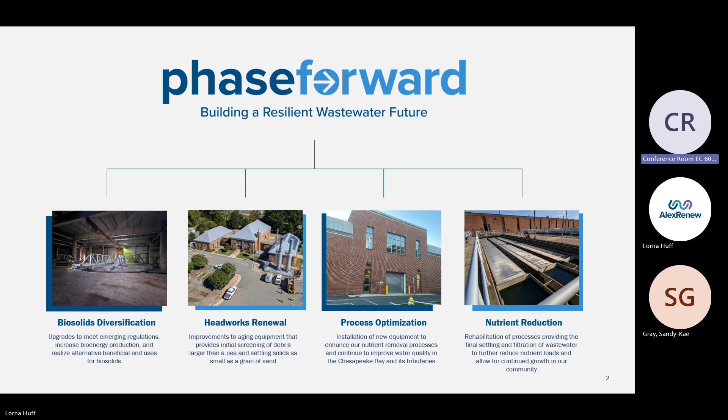Process optimization is the improvements to the centrate pre-treatment system. Mr. Chan provided an update and presentation on this back in February 2025 involving anammox and the red bugs. And then nutrient reduction was the subject of last month's board update on the tertiary project as a whole—the major improvements that were presented by Ms. Watkins.

So a quick update on the overall phase forward schedule for these 4 primary projects—a reminder of where we've been in terms of design, and where we're going in terms of upcoming milestones in fiscal year 26 and 27. The schedule we have laid out is fiscal year, not calendar year.

Starting with process optimization, this project is well in the middle of construction now, and we're targeting an August 2026 completion. On headworks renewal, design is advancing pretty quickly.

We have an amendment coming up in April 2026 for board review and approval. Following that, construction will kick off, and then we'll be approaching our final amendment in winter of 2027, with construction continuing on towards Q4 of fiscal year 2031.

On biosolids diversification, the solids upgrade program, we've had 3 amendments executed to date, with our 4th amendment actually up for board review and approval tonight regarding the thermal dryer pre-construction services. We'll touch on further detail on that later in this slide deck, as well as in reviewing the memo.

And then finally, nutrient reduction—we're really kicking off the design phase of this project tonight as well. It's up for board review and approval, with design services to start commencing in the next couple months. So, an overall highlight of the major milestones, project completions, and amendments for board review.

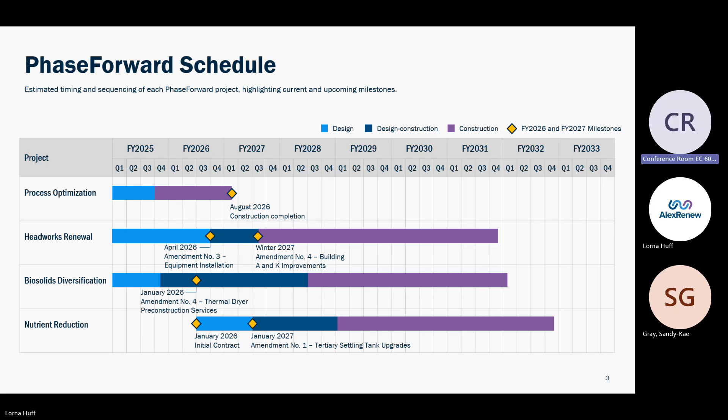So as we start to take a look at overall capital costs and where we're at, this slide highlights each project's major touch points and storylines. For process optimization, construction is nearing about 30% completion now, and we are on track for overall project completion this summer. Crews and the design team are now coming up with a plan to commission the system as a whole and bring operations and maintenance along.

On the headworks renewal project, this is the upgrades to the screening, grit removal type equipment. We've been taking a look at the scope over the last year, as well as our project budgets, and meeting with our operations and maintenance staff through design input sessions—opportunities for staff to tell us what they like about components, what they don't like, how they want the system designed and set up, and certain types of equipment or manufacturers that work with them.

We take that information back, make sure it's aligned with the overall project scope and goals, and ultimately come up with recommendations to make sure the project stays strict and specific to elements that are actually needed. Oftentimes we'll get requests for nice-to-haves or wants, but we've taken a look at the overall budget and scope over the last year and made sure we dial that down to critical needs and critical infrastructure and upgrades that need to be updated.

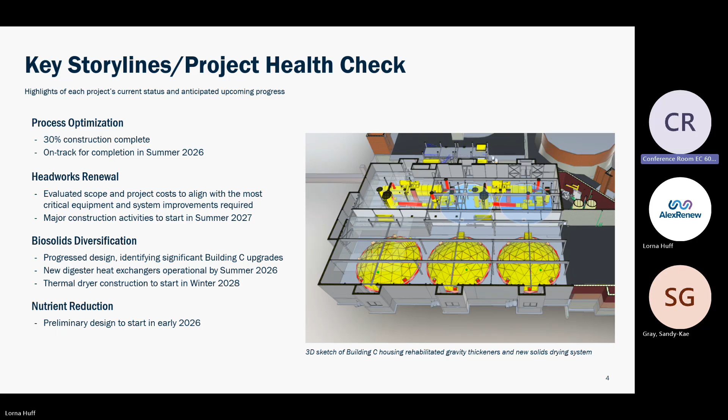As far as nutrient reduction, that preliminary design is going to be starting in early 2026, over the next couple months, with up tonight the initial contract for review and approval.

The next couple slides that we have laid out are really identifying a preview for FY 2027. We've identified on each of these slides the approved 2026 budget and the draft 2027 budget, highlighting key contractual milestones along the way. We've also had color-coded circles indicating board approved, pending any future action, and board approval via annual budget.

As we walk through these slides, you'll notice some projects have more green-coded bubbles associated with them. That lends itself to getting more cost certainty as the project moves forward. And then we'll ultimately take a look at overall program cost certainty.

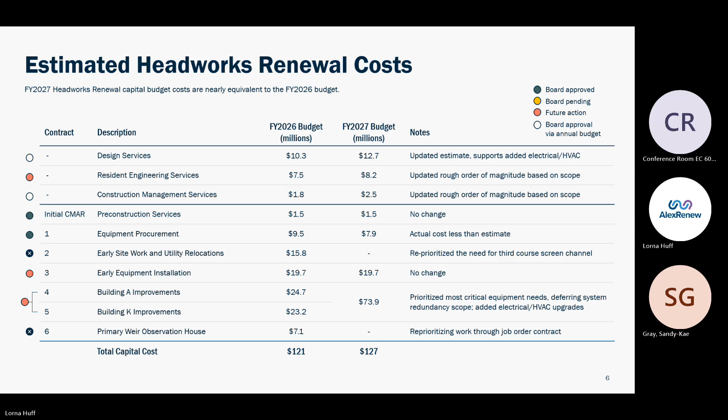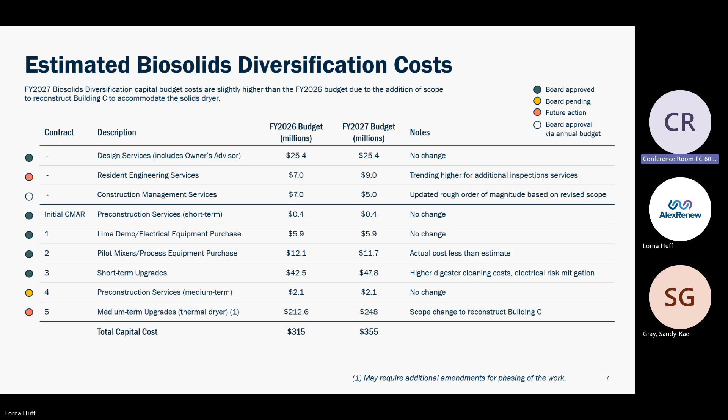We just went to the board last month to do an update on where this project stands. And for tonight, it's review and approval of the preliminary design of that project.

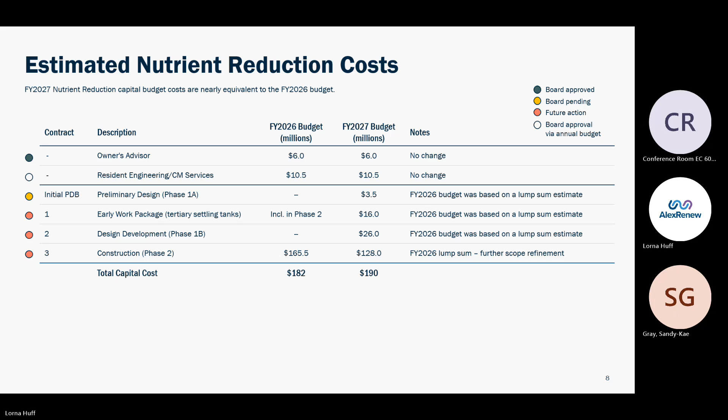This slide is showing our overall capital cost evolution. You've seen this slide on a project-level basis before; this is now focused program-wide as a whole. On the left-hand axis is your cost variability. In red is your upper range of probable cost, and the bottom is your lower range of probable cost, with a series of vertical lines demonstrating different design completion milestones.

The cost certainty is tied to when your design is complete, which ultimately leads to an executed amendment. As your design progresses across various projects and amendments get executed, your cost certainty becomes more defined as you go.

For example, at the start of FY 2025, what we'd executed at that point was really just the contract for process optimization, the project that's about 30% construction complete now. At that time, overall PhaseForward costs could have ranged upwards of 100% on the high end, down to around 50% on the lower range of probable costs. So it could have been higher than the 100% estimate or come in 50% lower.

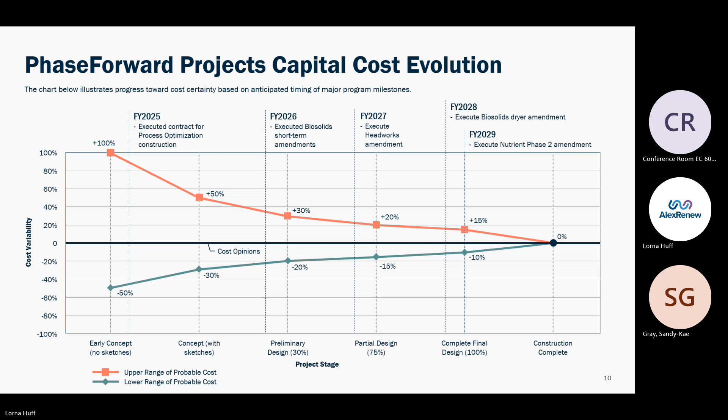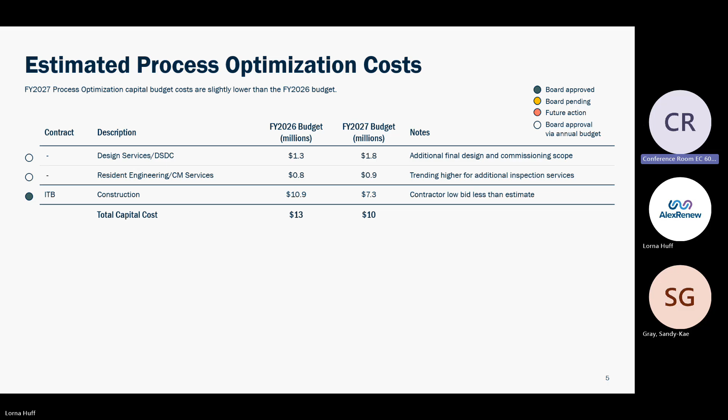Can you go back a couple slides to your capital spending per fiscal year, the bar graph? That one. So in fiscal year, and you always see this in CIP spending, fiscal year 30 is the most expensive year — your headworks renewal, biosolids, and nutrient reduction are all occurring in that same year, fiscal year 30. CIP is over 150 million. I know you're trying to do a lot of work in a small amount of time. Is there any advantage to trying to spread that curve out, or not having everything in construction at the most expensive point in fiscal year 30, spreading it to 31, 32, or is the timing of this all intertwined together such that it would be hard to do?

Yes, I want to get this work done as quickly as we possibly can across all of them, specifically biosolids and headworks — we're replacing and upgrading critical equipment along our treatment process, and the nutrient reduction project too. It's always possible to spread something out, but we run the risk of not having our equipment upgraded and improved and being able to treat the water.

I think biosolids, no, headworks, no, but nutrient reduction is where we have the most ability to look and see what we actually want to build. That's a very conservative estimate right now. Ms. Glapion presented last month. I think nutrient reduction assumes we're going to build 6 new denitrification filters — that's the worst case scenario. We're hoping that modeling shows we don't have to build that full suite of filters, and that's something we could look at kicking off and pushing down the road potentially.

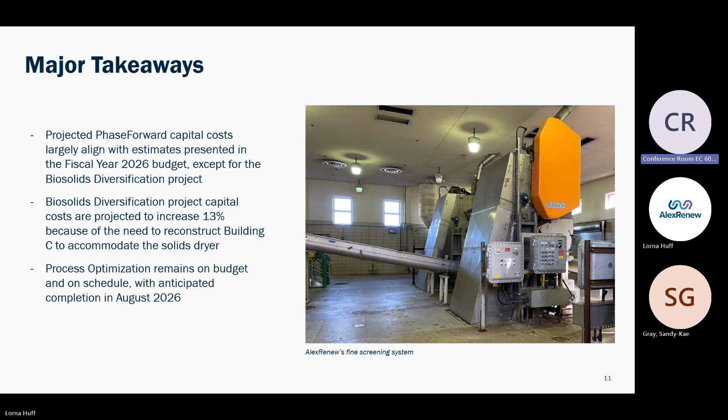Any further questions? This was excellent, provided great context for what comes up next. Thanks.

Yeah, you're good. We still have some new items of business to get to. Nutrient reduction project contract amendment number 1. Mr. Carl, Ms. Blevins, good evening.

Going to tab 5 in your packet, there's a memo. Ms. Blackham presented on this last month. As Mr. Pylan just presented, this is the first phase that includes the design of the nutrient reduction project. A big effort here is part contractor, part designer. This is a progressive design build job, so we will be doing significant modeling of our wastewater plant.

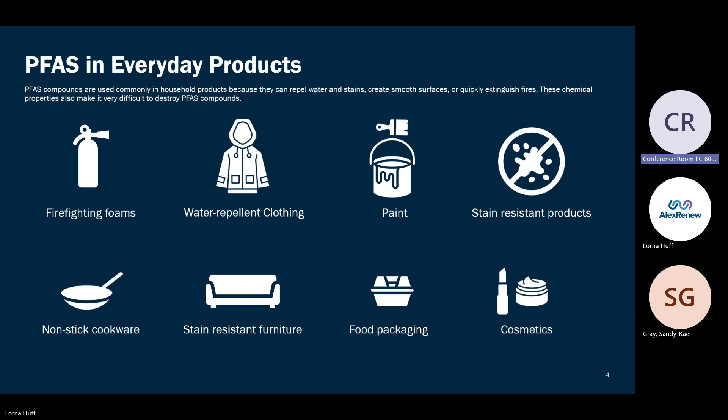Kind of zooming in on this, how we use them and the kinds of concentrations we're exposed to in our daily life. Thank you to DC Water for this wonderful graphic. DC Water's been doing a lot of good work on this. When you compare PFAS concentrations in parts per billion in biosolids or US blood serum, the CDC has been monitoring PFAS in human blood for a while. You see very low concentrations when you compare it to other things we're exposed to, like national averages of food packaging. So we're looking at maybe 100,000 parts per billion compared to 130. It really shows there are a lot of different ways we can be exposed to PFAS.

What is Bloom? Bloom is DC Water's biosolid product that they market and sell.

Mr. Robertson went home and threw away all his ketchup when he saw the ketchup number.

It's interesting when you think about the slide too, you can just add three zeros to the right of everything in parts per trillion. When you go through and start thinking about how PFAS gets into your wastewater, the theme of today's presentation is, we're a residential community. You can see how it easily gets into the concentration of wastewater in parts per trillion, because again those are in parts per billion. So add 3 zeros to the right when comparing it to influent concentrations in wastewater. And these are the things that we commonly use. So to Mr. Carl's point, PFAS is around us and we're going to see it when we sample in wastewater, regardless of whether you have industrial contributors.

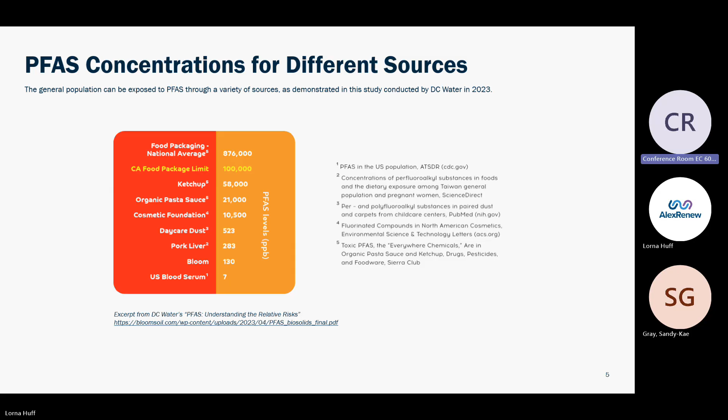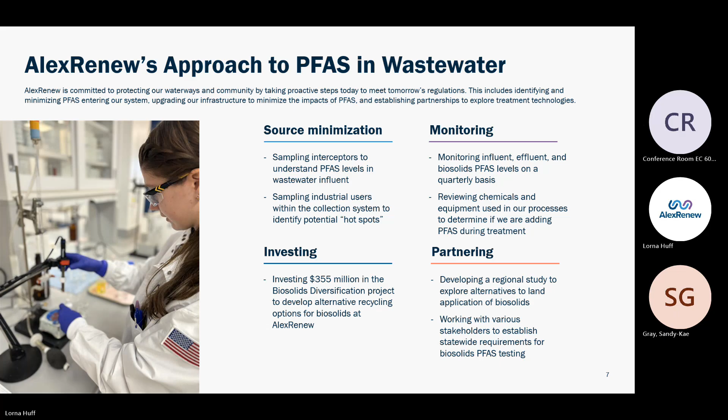A reminder about the test methods for PFAS. The EPA has approved a test method, 1633A, now that they modified. And that test method is only approved for 40 PFAS compounds out of 5,000.

So this can cause complications as you're trying to understand where PFAS are coming from or how they might transform through your treatment process. And so we only have really a small lens in the world of all the PFAS that are cycling through our environment.

And as we presented last time, PFAS are tricky. Research has shown that they can transform through biological processes like wastewater treatment. So you can get measuring PFAS in your influent and not see all of the precursor compounds that are coming in. Those precursor compounds can then be transformed through biological processes in the treatment process into compounds that you can see.

And so oftentimes through wastewater treatment, you may see what look like increases between influent, into your effluent and biosolids. That really is a result of the small amount of compounds that you can see and the enormous family of compounds that you can't detect coming in, and how those are transformed through.

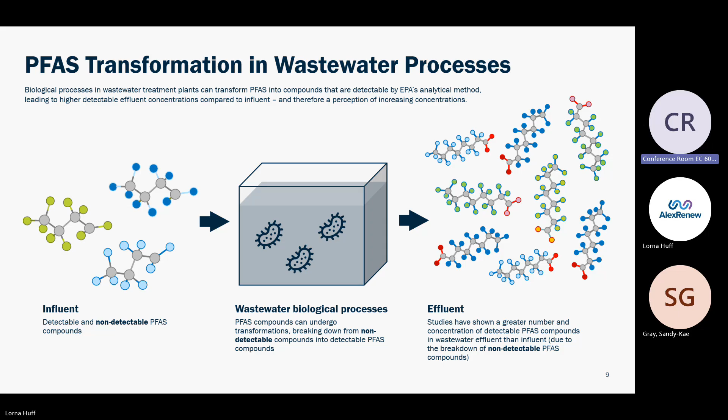So getting into the sampling that we've done since we last spoke. We've done significant sampling in our collection system, kind of starting at AlexRenew. We've been sampling, you'll see sampling results from the quarterly monitoring program of our influent and biosolids.

We then expanded to the 5 main interceptors to understand if there's sections of our sewer shed that we may be seeing higher contributions of PFAS. And then we sampled our industrial users, our 3 industrial users, Inova, Reworld, and Alsco, to understand if they might be contributing PFAS into our system.

We're planning to repeat this testing next year and are working closely with Fairfax's pretreatment program to sample the significant industrial users in Fairfax County that contribute to our solution.

Starting with our influent and effluent concentrations, we're focusing on PFOA and PFOS because those are the two compounds of regulatory concern, comparing against national ranges. The national ranges we have are pretty broad. They include folks that are more residential like us, and also other treatment plants that might have significant industrial users who are PFAS manufacturers or significant users of PFAS in their system. However, when you compare our influent and effluent for PFOA and PFOS, we're consistently at the lower end of these national ranges.

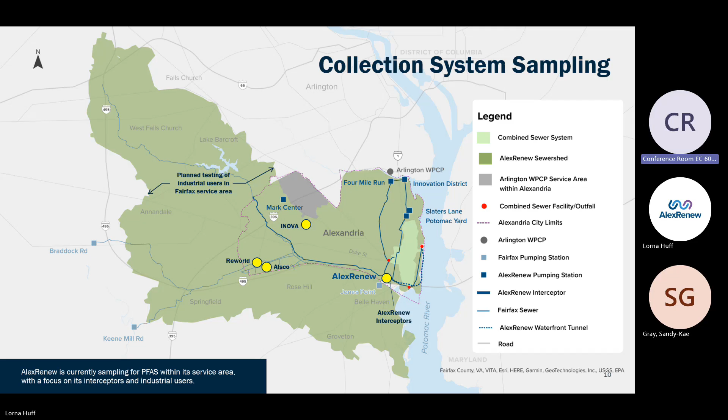So when we start looking at data between the pipes and where it's coming from in the community, we didn't see a differentiation there either with respect to concentrations. One could say that all your industrial users tie into Holmes Run, so that's going to be a peak or a spike, but we're not seeing that data, either in the sewers or at the locations of these users. So in short, we're primarily residential municipal background concentrations of PFAS. We're not Michigan, we're not San Francisco, where you've got big users of industry tying into the system where you can do source reduction to get rid of PFAS.

Yeah, we are looking to repeat the sample. Don't forget, it aligns with our influent - we've been sampling the influent now for 18 months, and we're not seeing jumps around that either. That's quarterly sampling of influent, so it aligns well with the influent-effluent concentration we've seen.

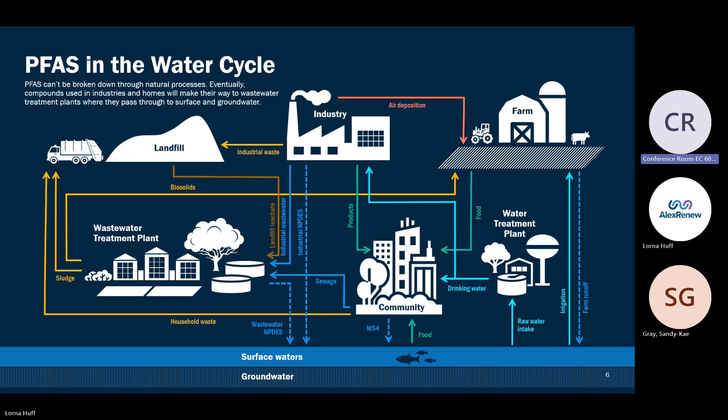So when I was looking at those numbers, is there a factor of how wet or how dry the period was? Can you compare that to the flow you're seeing at the plant? Is there some correlation? Is it a drier period, would you see more of this concentration, so less dilution? These are biosolids, it could also be that it's hotter, and we're seeing more transformation of precursors.

I think at this point we don't have enough data to speculate or draw correlations. But as Mr. Carl mentioned, in such small concentrations, there are very small changes in either what's happening in the collection system or what's happening at the plant that could cause variability, and it might be hard to pinpoint what those are, particularly since we're primarily residential.

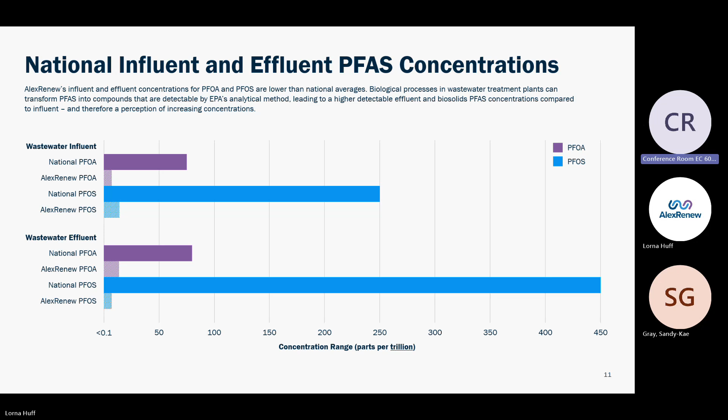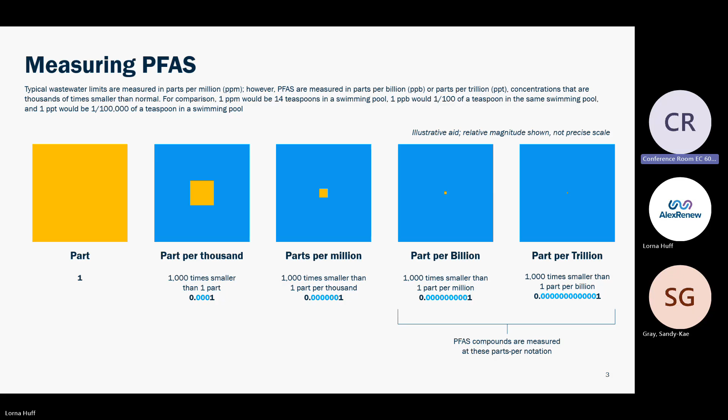Yeah, these look like huge increases. And you look at your slide 3, yeah, parts per billion, you can't tell the difference. Correct, it's like somebody sneezed that day. It really is. I mean, it looks like big variability when we're talking about parts per billion and when we present it like this.

I think there are a number of things that you can speculate, but each quarter is one sample, so that could be instrument error. We see that even the analytical methods and the method detection limits for each of the labs changes.

So it could be that with more testing, more sampling on the same day, in effect you average, you throw out the highest 10 and lowest 10 as aberrations, and average. There are methods to, when you have this kind of thing in statistics, get to a number that is more likely to be true.

I think that's why consistent sampling is really critical, because you have these fluctuations that look big and will put you into another regulatory tier that will cost you serious money, but it may just be an artifact of how you sampled or how the analytical method was applied that day.

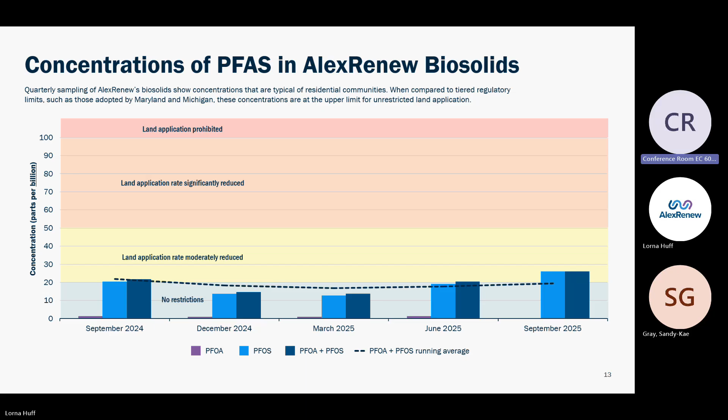The data is constantly evolving. I think one of the things that's been difficult is finding comparable data sets, and we're seeing that more and more. Last week, North Carolina Department of Environmental Quality published their preliminary study, looking at data sets from across the country, some we hadn't seen yet, so we included it here for you tonight.

When we look particularly at our PFOS concentration and compare it against Georgia, Kentucky, North Carolina, and Michigan, you can see the work Michigan has done - this lower bar is after they've gone through their source reduction program. Michigan is a state with a lot of industrial users, like metal finishers and platers, who use PFAS daily. Consistently though, AlexRenew's PFOS concentrations fall in the lower quartile compared to the others - we're at the very low ranges compared to other national and state data sets.

This slide is also very interesting. So when we talked before about how states are adopting those tiered levels based on sampling that was done in Michigan in 2017, 2018, and a while ago,

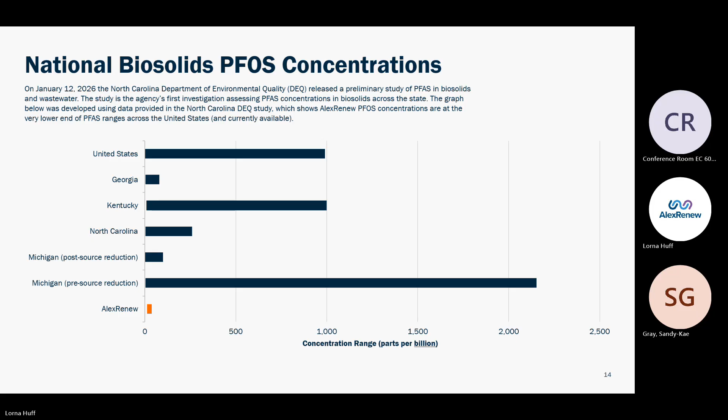we now have a data set in North Carolina to compare that to. And what's really interesting about this data set is two things. One, we can see that when we look at Michigan's pre-source reduction, their ranges are from very close to zero to like 2,300 parts per billion. When we look at North Carolina's data, we're seeing much lower, much smaller ranges and much lower concentrations in their biosolids, which points to a need for states to do their own sampling before they just adopt tiers.

Another thing that's really interesting about Michigan compared to North Carolina is that Michigan is a very industrial state. North Carolina a little less so. And North Carolina is trying to answer this question of, are there differences in PFOA and PFOS concentrations based on the character of the wastewater that a wastewater treatment plant is receiving?

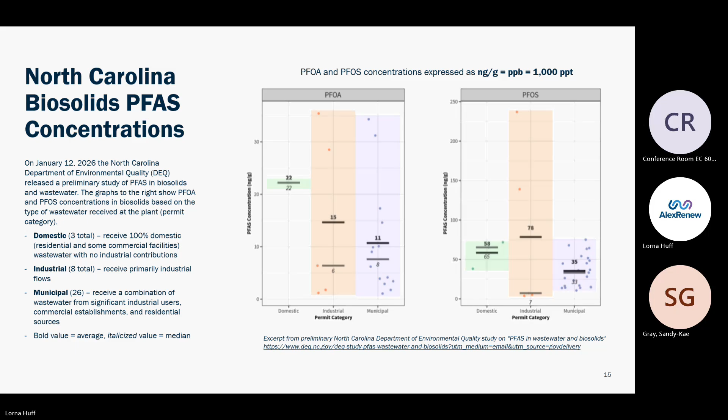So I'm going to pivot a little bit, but really we see this as a risk. We see states adopting this tiered approach. Our monitoring is showing that there are times during the year, and based on how the regulations may come out in Virginia, there are times during the year where we may be restricted in what we can land apply. And with Michigan, we've seen iterations where, as they address significant industrial users, those tiers are reduced.

Michigan's original tier to prohibit land application was 150. They're down to 100, and as they go through sampling and address their industrial users, they're starting to ramp down. So it's a different regulatory paradigm from what we're typically used to through EPA. So we have an opportunity to leverage this investment of $355 million in our biosolids diversification project to start to put us in a good place to be able to figure out what we're going to do with our biosolids if we're restricted or severely restricted in our ability to land apply.

Mr. Pylong spoke about our biosolids diversification project earlier. It has a number of very complementary goals. Initially, we had started this project to repair and replace equipment, aging infrastructure that needed upgrades.

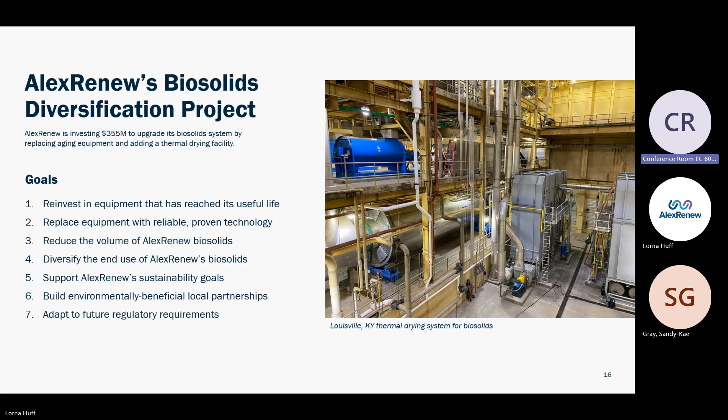On the right, you can see a thermal drying system for biosolids, what that looks like installed. So as you all know, we are moving towards thermal drying. I have some show and tell for you all.

Like Shark Tank where they hand out. I know, right?

So I thought it would be helpful with this slide for people to get an idea of what we're starting with and what we're planning to end with.

So right here, this jar is our dewatered biosolids cake. It's about 75% water. It's what we currently land apply.

After the drying project is completed, we will be producing biosolids pellets that are about 5% water. Going from cake to pellets, even though I should have filled that one up and then filled this one. I should have put more, in hindsight. Dealing with cake in a small spoon and trying not to get it all over your desk is a challenge. I do not recommend it.

But going from cake to dried pellets is going to reduce the volume of our biosolids produced by 60%. It also sets us up for some really potentially beneficial end uses.

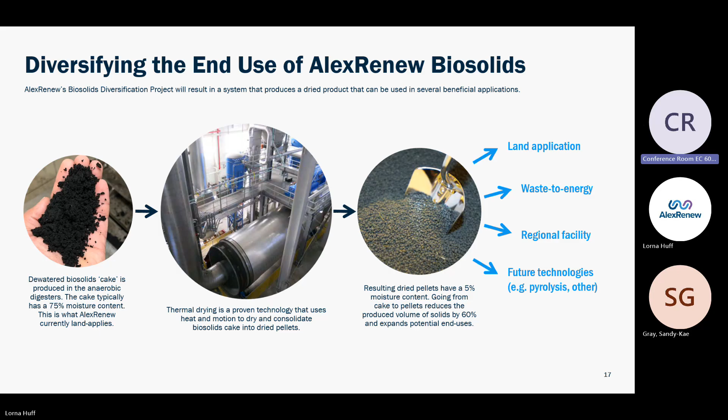Thanks for the opportunity to come and talk with you all. It's a little warmer here than back home in Minnesota right now.

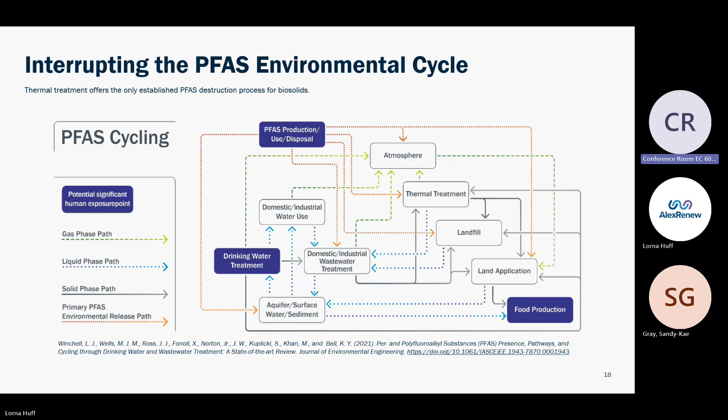So in our world, there are various thermal technologies that you can consider, if you're so compelled to do so for PFAS treatment.

Historically, the main high temperature thermal technology in our business is incineration. This is combustion. I think the first incineration facility was installed in Michigan in 1935, so we've been doing it for about 90 years. Incineration is complicated, it's not easy, but we've been doing it long enough. There is a support community out there and we can make it reliable.

It has the benefit of, in rough numbers, reducing that dewatered cake that you have a jar of floating around by about 95%. That's the amount of ash that's left after you combust it. So incineration is our proven thermal technology.

There are other technologies emerging. Pyrolysis and gasification have been getting a lot of buzz in the last few years. We've been trying to make those technologies work in our field for as long as I've been alive. They're difficult in their own right.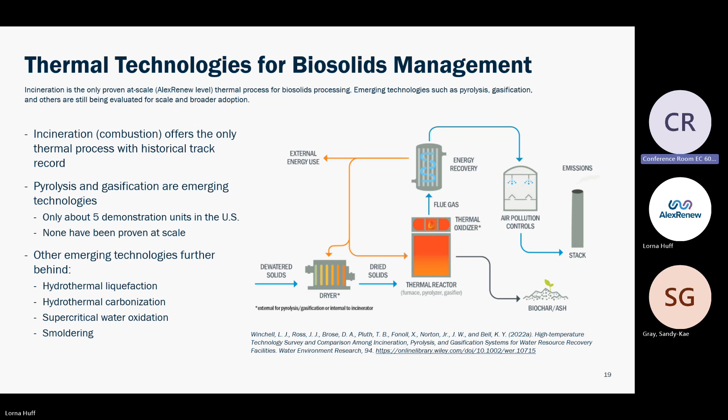They're not there yet. There are tremendous upsides to pyrolysis gasification if we can overcome those logistical and technological hurdles. But just want you all to be aware, eyes wide open, that none are proven to date. And then there are some other emerging technologies as well.

I didn't list drying in that list because it's not necessarily degrading the organic material, it's just removing the water. But we have studied PFAS through a full-scale dryer system out in California. It was a collaboration with Synagro, which I understand handles your biosolids right now for land applications, so you're aware of what they do. They have a dryer out there that we took some samples of.

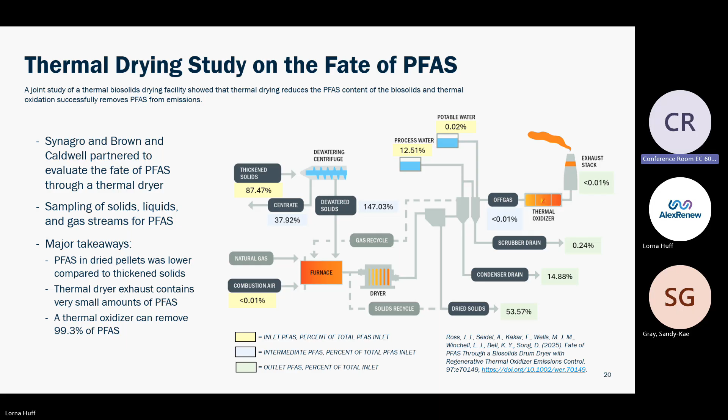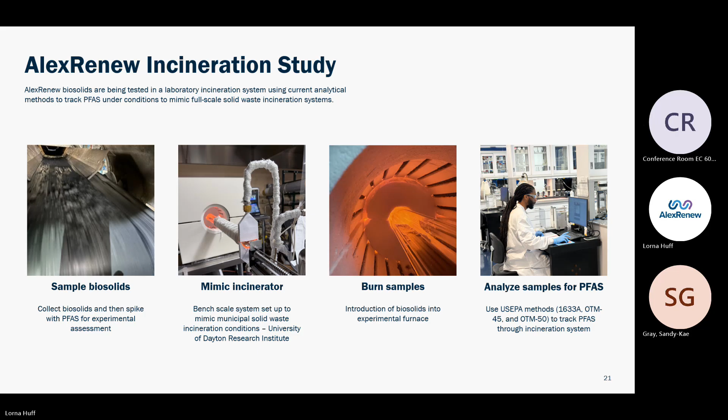I think the county of Honolulu has 4 or 5 plants that they're sending biosolids to this facility on an intermittent basis. It's not the entire load, but they send part of their load to this facility. It is operated by ReWorld; the other facility that is also incinerating in the US is similarly operated by ReWorld.

In the case of Honolulu, or H-Power, they send about 20,000 tons of biosolids to this facility. After they burn it, with that hot off-gas I mentioned, there's an opportunity to recover some energy there and potentially produce power. They're generating enough power from those biosolids to power about 1,500 homes on the island.

While we're on this slide, the combustion of the biosolids is what's generating the heat to do the conversion. So they're combining municipal solid waste, trash, with biosolids in it. When you calculate the BTU value of the biosolids released from the combustion process, that's enough to help drive power for 1,500 homes. So is the BTU of the biosolids greater or less than what municipal solid waste would be?

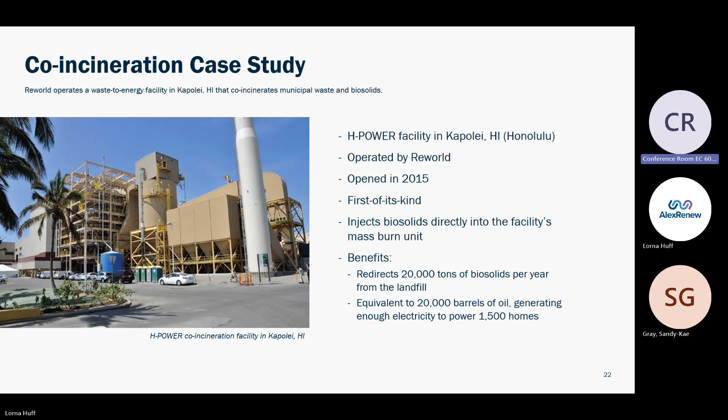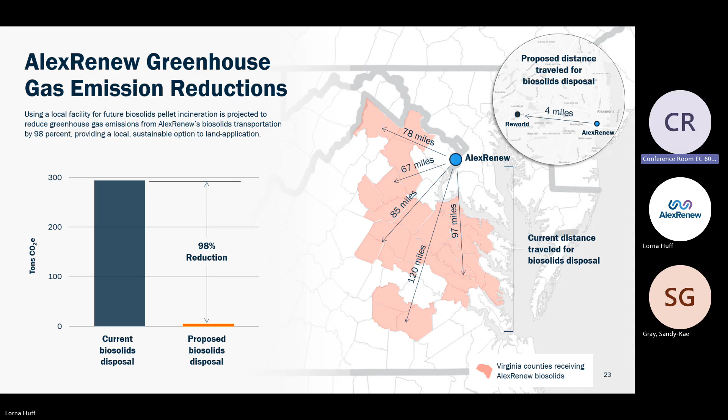I talked about PFAS, but there are other aspects to consider, like greenhouse gas. As we've been considering this partnership with ReWorld, we've done research on PFAS but also analyses on other potential environmental benefits. One of the big benefits is not having to load 2 trucks a day with biosolids and have them travel an average of 90 miles outside the city. If we're able to find a local solution to take our dry biosolids pellets, that alone would reduce our greenhouse gas emissions from trucking by about 98%. Less trucks, more local -- equivalent to taking 50 cars off the road permanently. Pretty significant reduction.

And then finally, incinerators commonly have energy recovery systems. The one operated by ReWorld here also recovers energy. With our dried biosolids product, our research has shown it has more than 6,000 BTU per pound, and on an annual basis, if used for energy production, that would power about 2,800 houses for one year. So also a significant energy generation benefit.

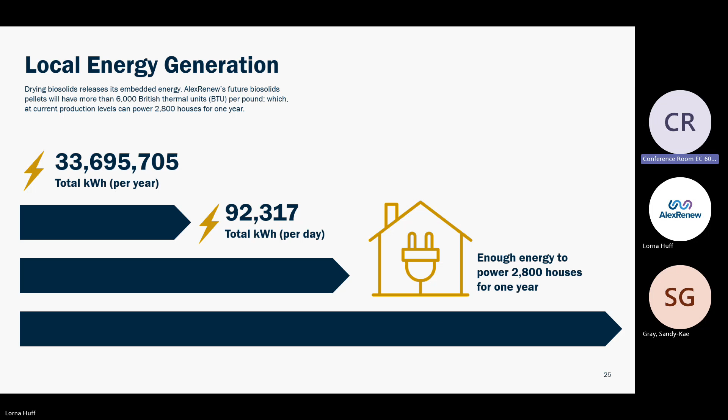If my recollection's correct, that's about 15% of the waste energy facility's current production. I think there are about 20,000 homes that their facility now powers through that. They basically run electric generators -- they're the most northern electric producer in Dominion's grid.

Where are they located? Eisenhower Avenue, you know where the UPS facility is? Oh, you mean Covanta? Yeah, it used to be Covanta. The company changed its name to ReWorld. Stop off there, no, I know exactly where. I always knew that as Covanta. I didn't know they changed their name -- they recently changed it to ReWorld. We still call it...

By the way, great presentation. I got a question, follow up on what Mr. Hill asked.

The PFAS incinerator changes it to carbon dioxide, water, hydrogen, and fluorine. Where does the fluorine go? Hydrofluoric gas - is that a gas? What's the concentration of that? It depends on how much organic fluorine you're adding to the system. I don't know that I'd run the calc on what the concentration would be in a typical municipal biosolids incinerator. But the hydrogen fluoride gas gets caught in a scrubbing system, typically a wet scrubbing system, so it's getting dissolved in water. So it becomes a fluoride ion.